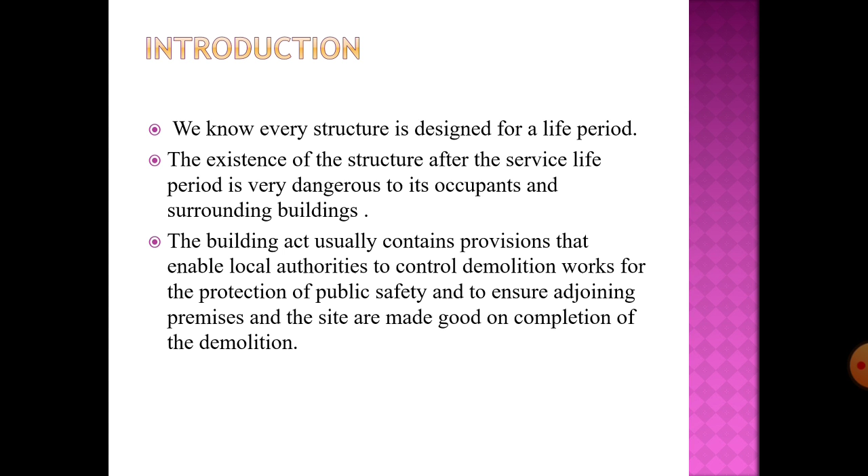Demolition is the process of tearing down and falling down a building after its life period with the help of some equipment or any other method. So demolition is basically the process of tearing down the building.

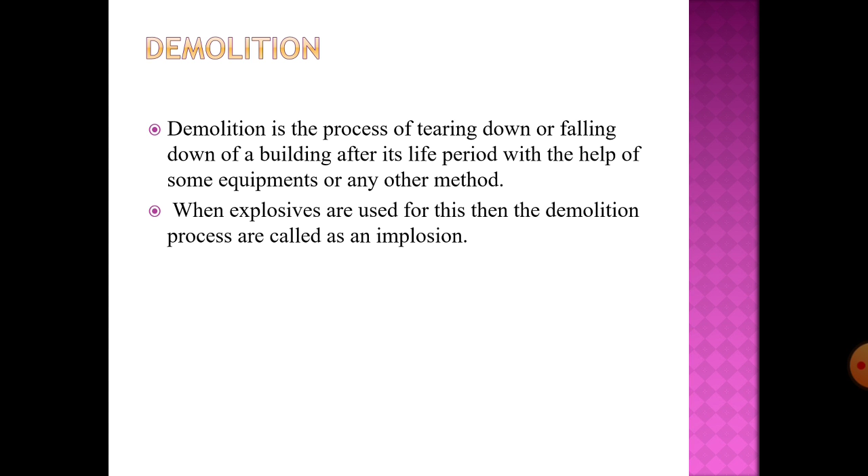If the structure is very rigid or a heavy structure, then explosives can be used to demolish the building, demolish the structure. When explosives are used for this, the demolition process is called implosion.

Steps before demolition. The following steps have to be considered before the execution of the demolition process. First is surveying. We have to do a proper survey, because if the building is situated near other buildings, we have to survey that particular area, whether the demolition done with explosives or mechanical means causes any damage in nearby areas or not. That we have to check prior.

Second one is removal of hazardous material. If there is hazardous material or anything that can harm humans as well as animals, we have to remove this first and then do the process. Preparation of plan: we have to prepare a proper plan of execution of a demolition process using explosives. And stability report: we have to generate a stability report, because the stability condition is required to measure which intensity of explosive we have to provide for demolition.

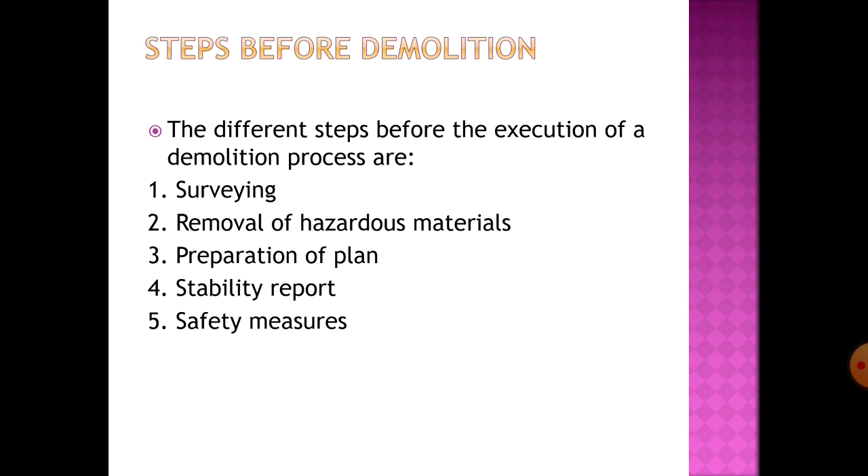Safety measures. In both conditions, if we are going to demolish the building by explosive or by mechanical equipment, we have to consider the safety measures of humans as well as animals.

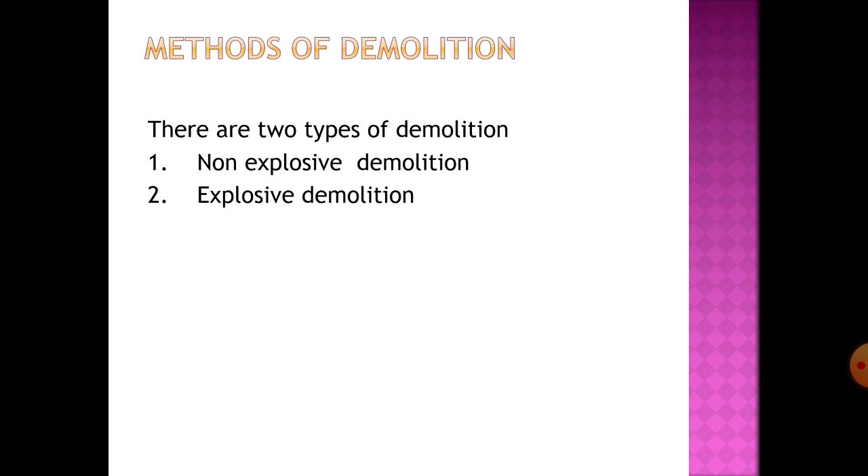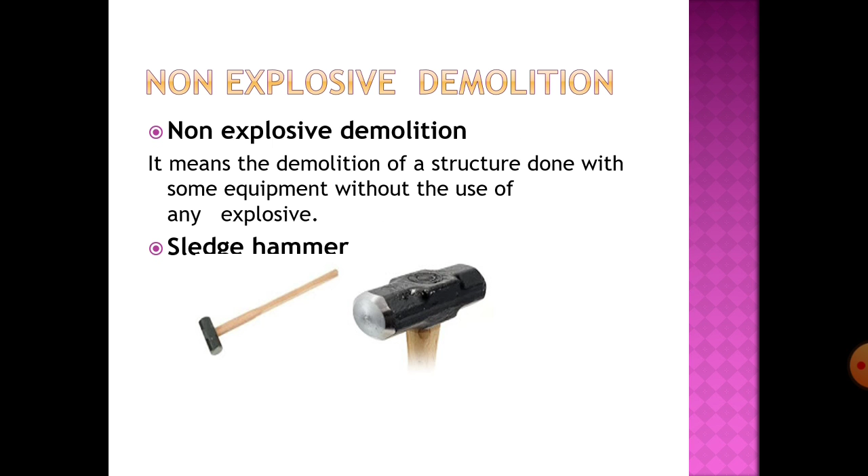Method of demolition. There are basically two types of demolition method. First is non-explosive demolition, second one is explosive demolition. The explosive demolition is called implosion. Non-explosive demolition means the demolition of the structure done with some equipment without use of any explosive, like a sledgehammer or JCB or Poclain machine, etc.

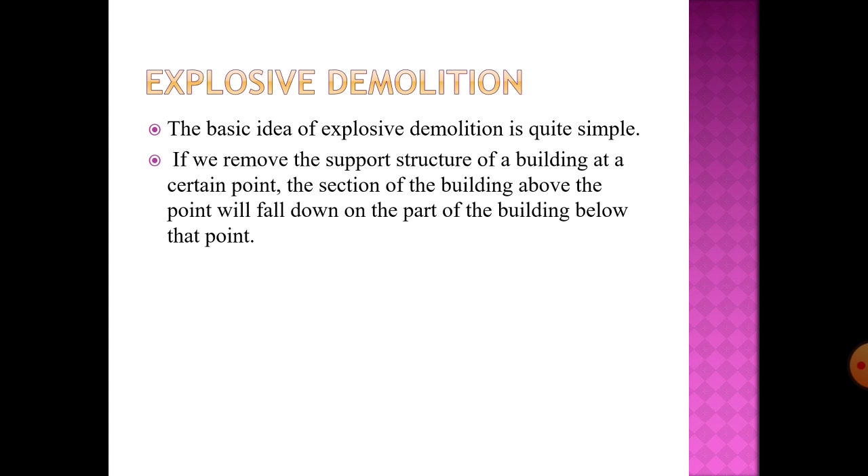Explosive demolition. The basic idea of explosive demolition is quite simple. If we remove the support structure of the building at a certain point, the section of the building above that point will fall down on the part of the building below that point. We all know that the beam is resting on the column, the slab is resting on the beam. So if we break that connection at a particular point, the structure will collapse at the same point because of the gravitational force. It will come down.

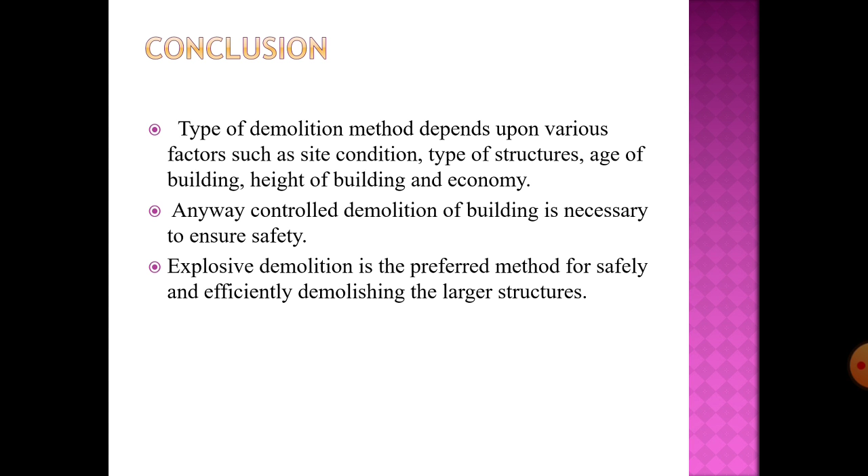So finally, the type of demolition depends on various factors like site condition, type of structure, age of building, height of building, economy, etc. The controlled demolition of the building is necessary to ensure safety is the priority. Explosive demolition is the preferred method for safely and efficiently demolishing larger structures.